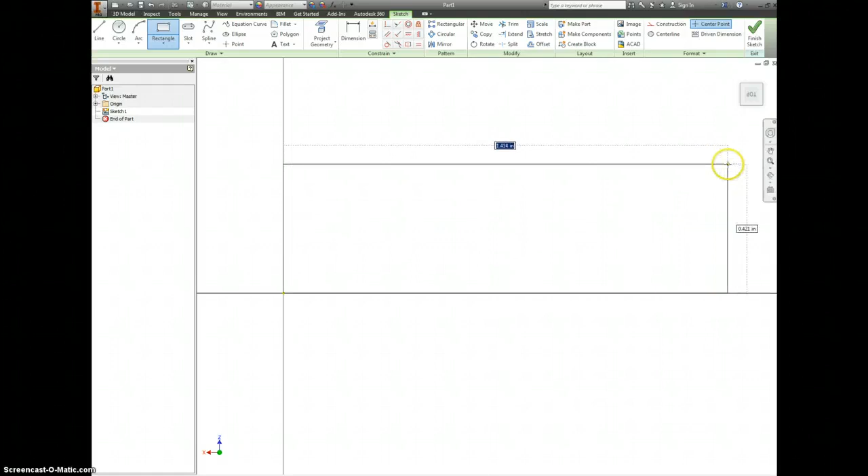Alright, so now we're going to make the puzzle cube box. To make that you have to use a series of rectangles, but there's a couple things to be careful of because we are going to be using a laser engraver. If you feel like you already watched this video, it probably changed on you, so be aware of that.

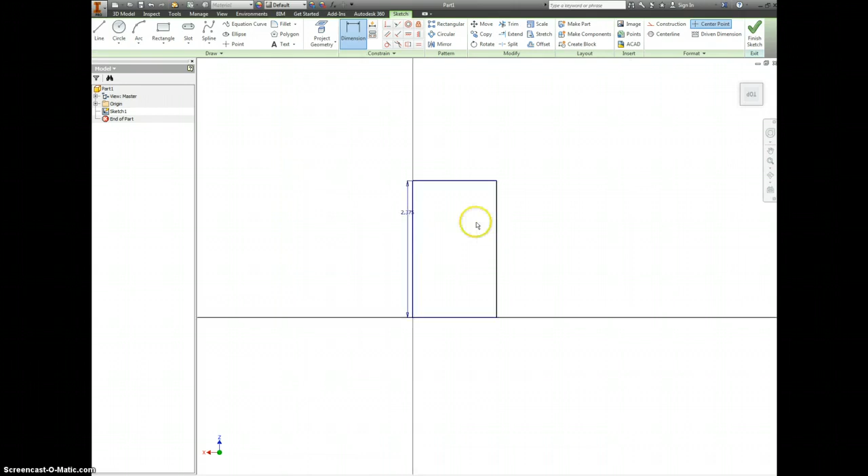Let's see here, we need to make this a little bit bigger than 2.25, so let's go 2.25 plus an eighth of an inch, 0.125. Not 1.25, 0.125. Alright, so that's how tall one square should be, 2.375.

We're just going to click and, not dimension, click and drag this out, so this looks about right. And we're going to use lines instead of rectangles. The main reason is I don't want to overlap any of my lines.

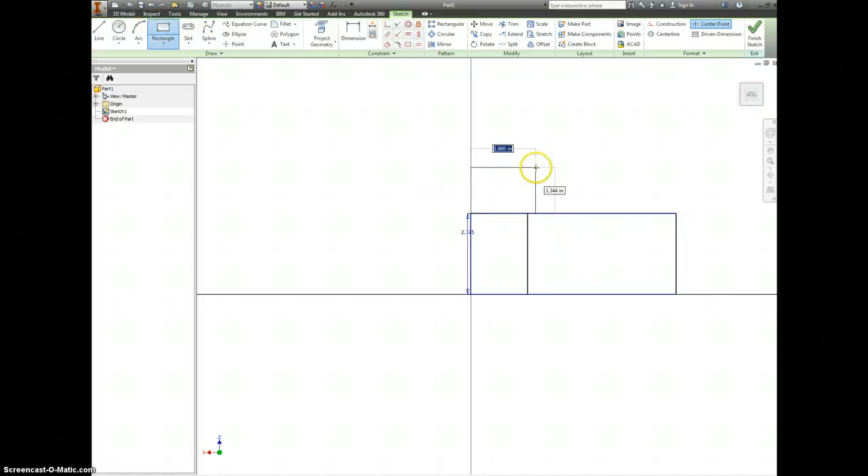Like if you use a rectangle, if I drew a rectangle inside of here, from here to here, now this line from this rectangle is overlapping this line from this big rectangle, and that's no good. The laser's going to freak out about that, and the whole thing will stop.

Alright, we do want them all to be the same size. We want them to be squares. So let's come up with something kind of simple we can use here.

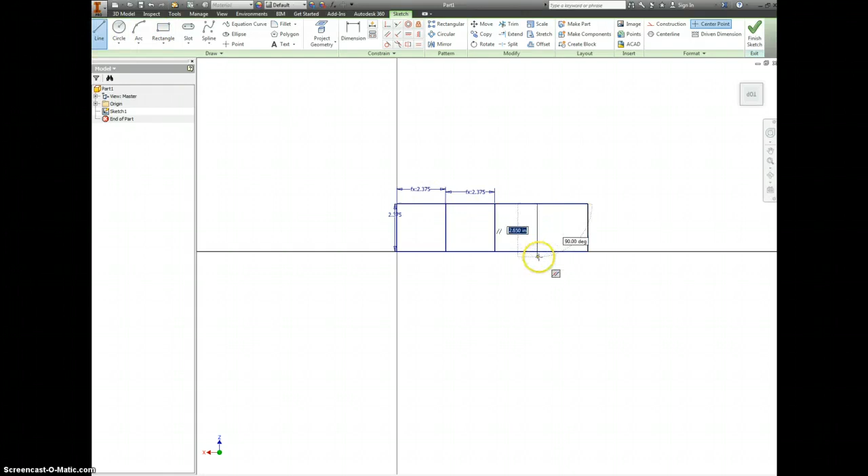And again, you want to make sure this will fit onto a piece of paper. So this can be no longer than 11 and no wider than 8.5.

I'm just referencing this dimension. In case I ever wanted to change all of the squares, I would just change this one dimension and they would all change with it.

Alright, so we have a top, side, bottom, side. And we should probably add a dimension to this one.

Alright, let's just double check. All of these add up to 9.5. So if that's the 11 side, that should be fine.

Let's go ahead and this time I will use a rectangle, but I need you to pay careful attention to what I'm doing right here.

Going to trim. I'm removing one of those line sections. Just click on it once. Don't click and drag, so then we'll get rid of both of them. So trim, single click.

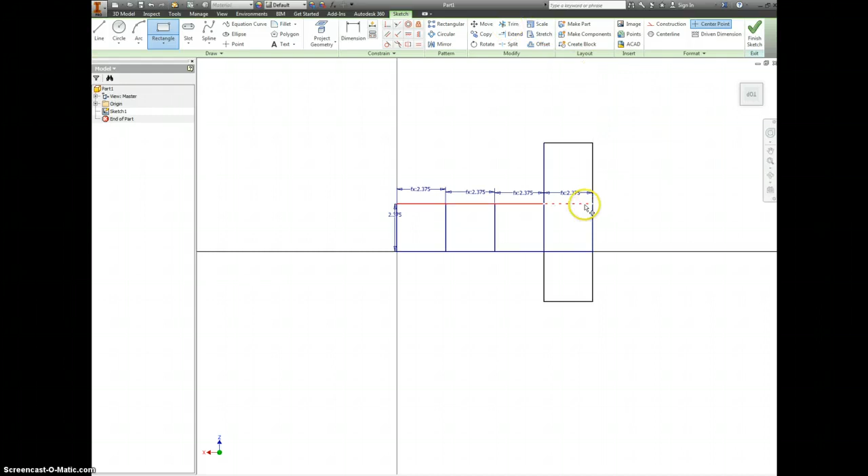Okay, let's dimension this out. I want that to be the same as this D0. I want this to be the same as D0.

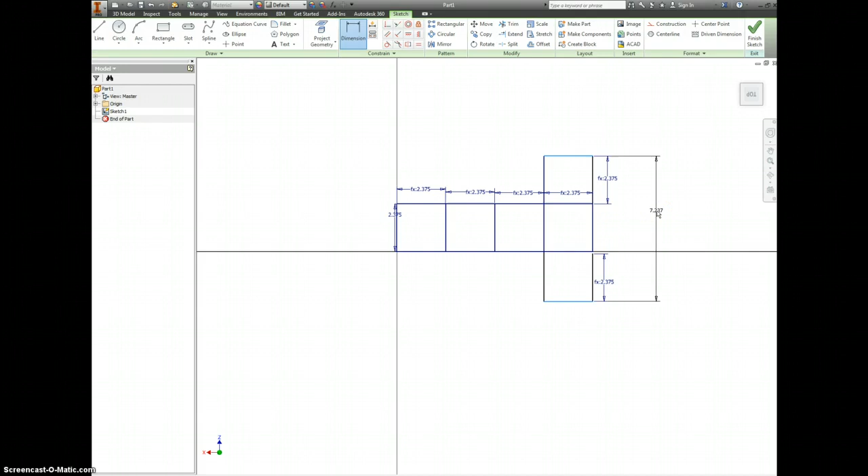This is a really basic, kind of boring puzzle cube box combination, but this is less than 8.5, and this is less than 11. Now, this isn't going to entirely work unless we give it some tabs.

So you can come up with these on your own. An easy way to do this is if you draw something up kind of like this, and then you go to a vertical constraint.

You find the little green dot on each one of these, top and bottom. It'll line these up for you. It'll make it to where those are the same.

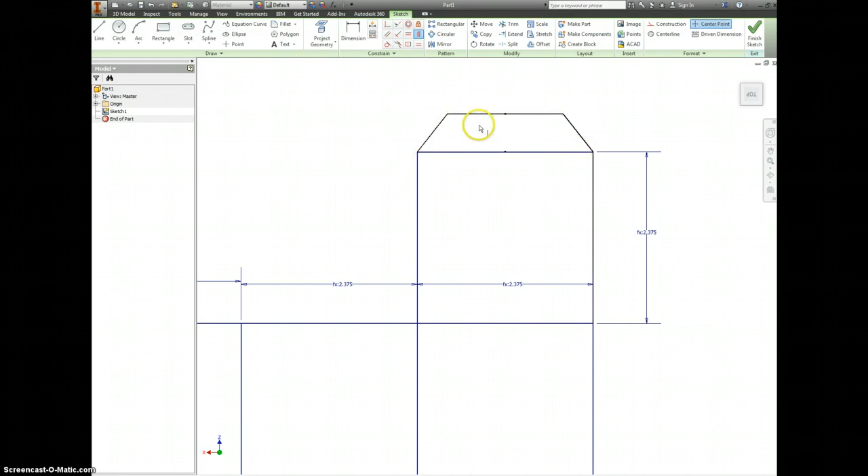Okay, you want to put these on both sides. Again, you want to be able to put the entire box together with glue and not tape. So think about where things would have to be glued together.

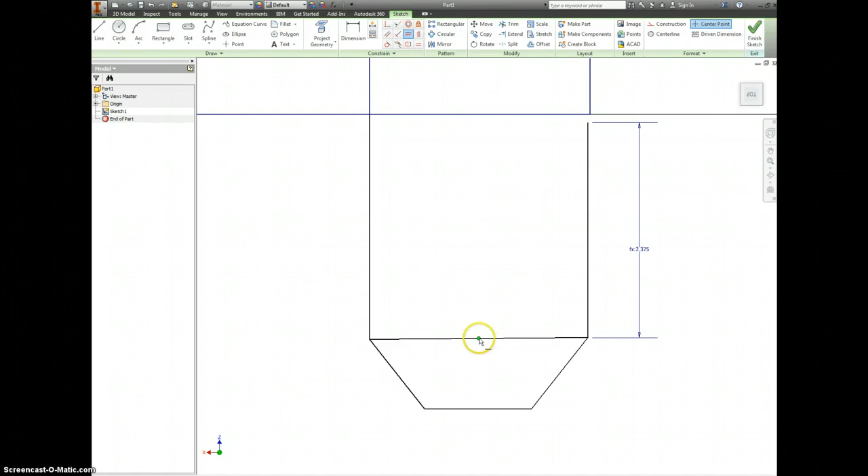If things start to get off on you, you can use a horizontal constraint like this. Click on the line. Oh, that's why. This was never actually attached to here.

So let's go back and attach that. So that has to be attached to there.

Vertical constraint, let's straighten these lines up. That's looking much better. And then vertical constraint on the two little green dots. That's looking good. If I want to constrain on these dots, I can make those about the same.

And just double check that your overall width is still less than 8.5. I'm not, it's 8.7. So I can click and drag these down and test it again.

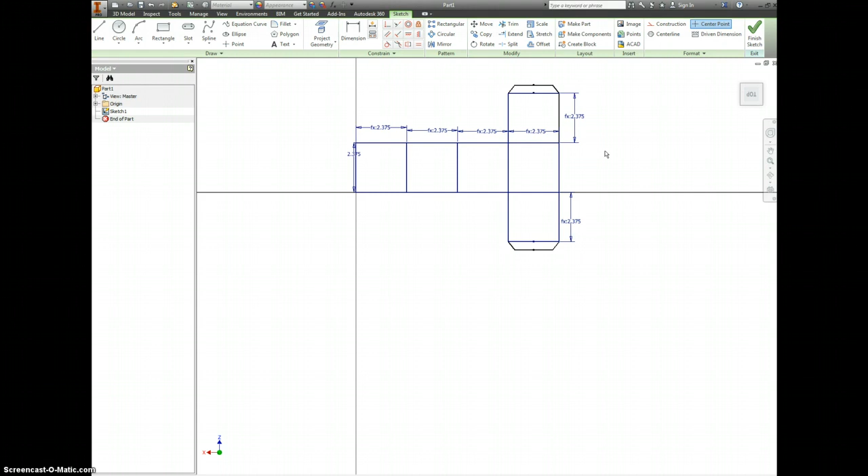There we go, 7.8. That's less than 8.5. Good. You're probably going to need more tabs in this, but that isn't the important part right now. So let's just save this.

Oh yeah, we have to finish sketch mode. So finish your sketch mode. It'll be in with the other puzzle cube stuff. I already have it packaged. I started the demo, but we'll call this package 2. I made some changes.

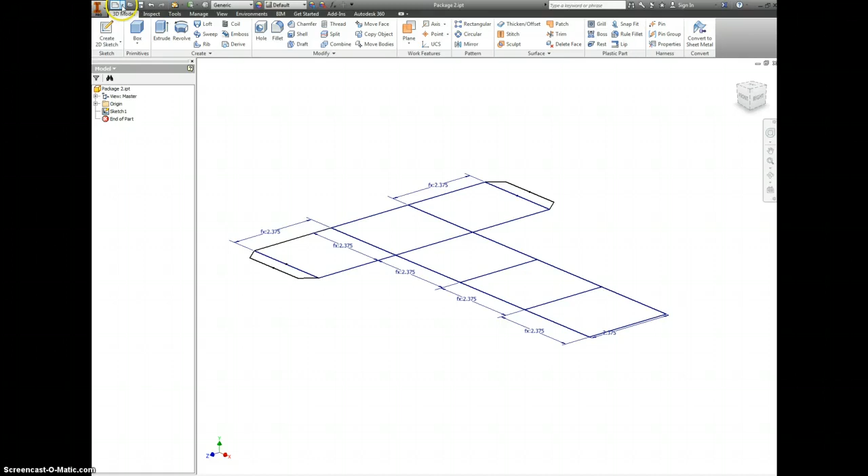All right, let's go to new drawing. You have to change the sheet size to A. Edit your sheet, make this A size paper, 8.5 by 11. Click OK. Right click, delete your border. Right click, delete ANSI large.

Base — I can't see mine. Mine's going to be the top. Yours might be left or right. You have to find whichever view it belongs in.

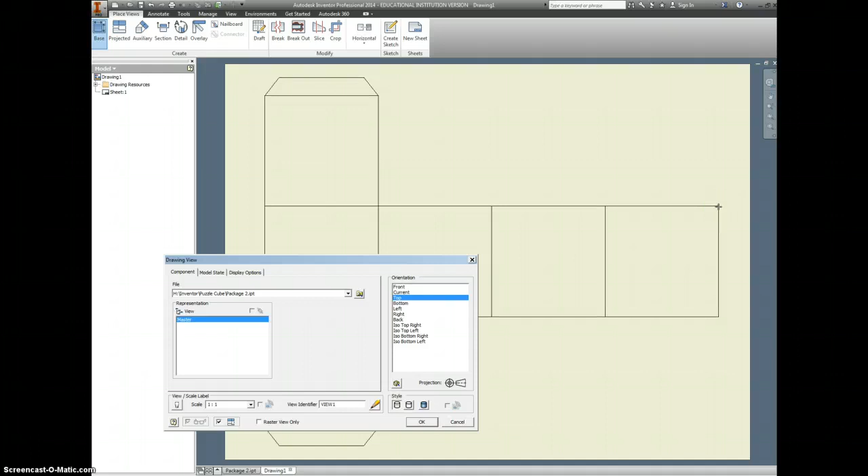You're going to save this right away as a DXF file. To do that, go up to this big I, select Save As, but don't click on it — go to Save Copy As. You want to change this to a DXF file, which is here.

Instead of saving it in your stuff, I want you to rename it with your last name, and maybe even first name, last name. We're going to put it on the shared drive.

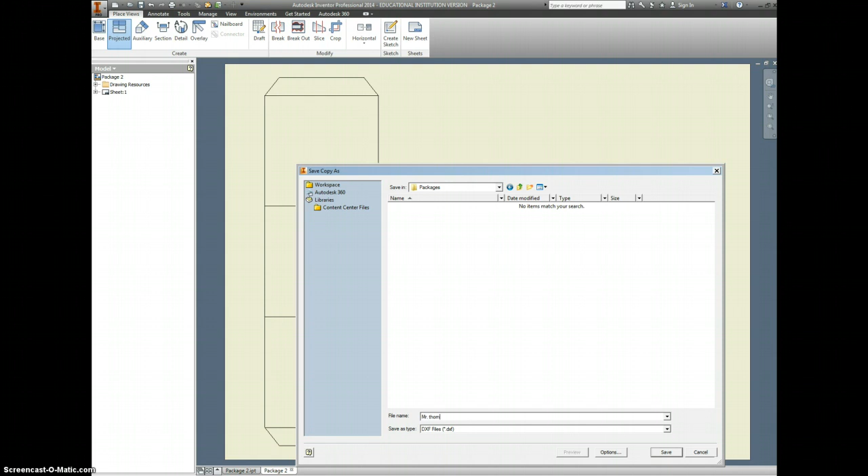Go into Shared, BCHS, PLTW, IED, and inside here you have this one for packages. Double click on packages. You're going to rename this with your name. You have permissions to save files into this folder — it's one of the few where I changed the permissions.

As soon as that's saved, then we can start to do stuff. Now when you go to base, just like before, you can go and search for your solution here. Open this up. If you go half scale, it should fit. You want an isometric view.

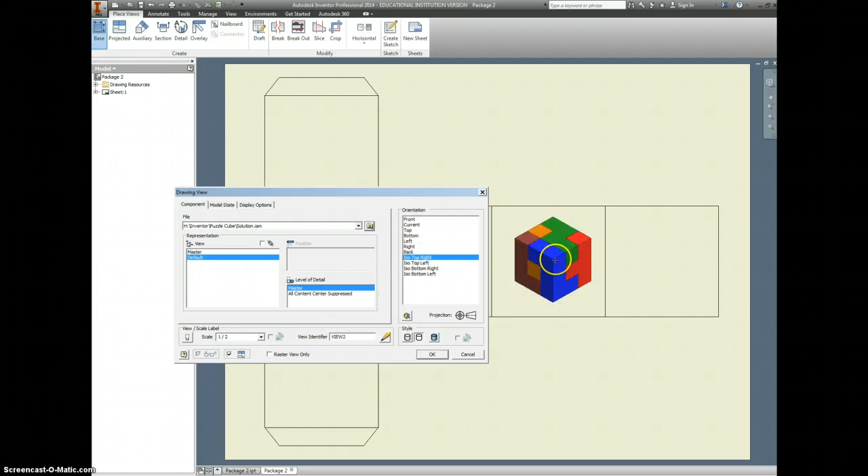And you probably want that to be shaded, so go back and make it shaded if you need to. As far as getting words and text and stuff on here, just go to Annotate. Here's your text button. Type in using whatever font you want, not Wingdings.

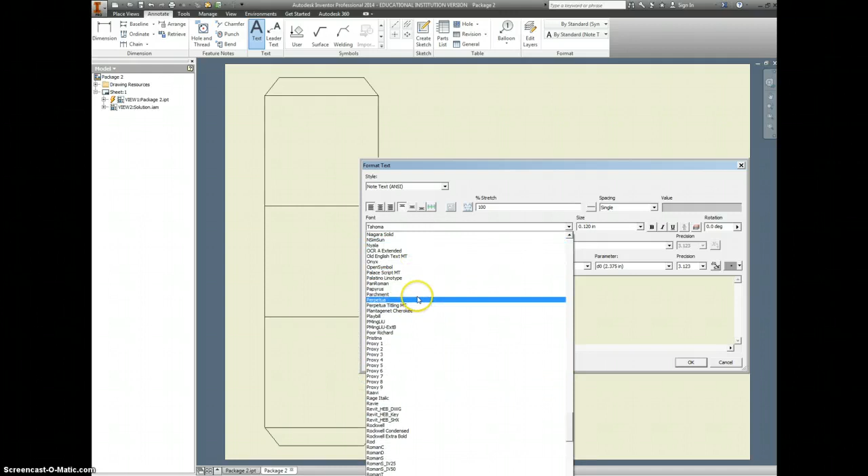I don't know, let's find something. And whatever size you want.

So there's my puzzle cube. Now if I need to, I can right click on this and rotate it 90 degrees. I can just keep rotating around if it was supposed to be facing some other direction.

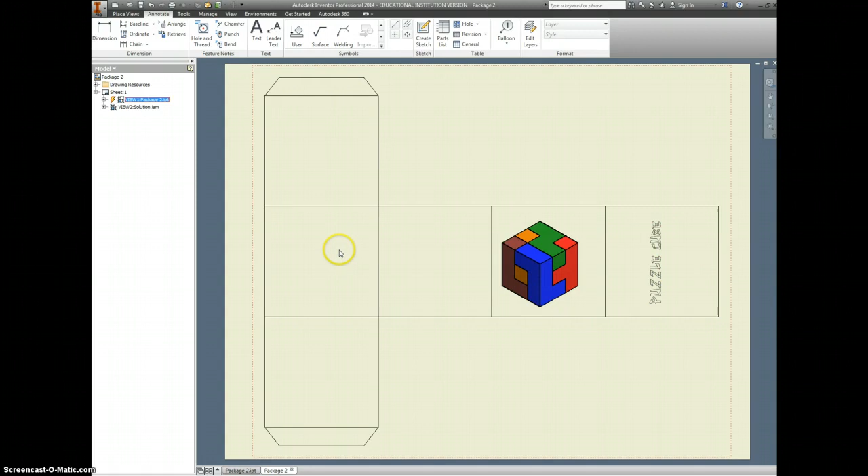If you want to put in a barcode or something, go up to Manage, Insert Object. We want to search for a Word file, so there's just Microsoft Word document. Click OK. It makes a new one called Document in Package 2, and you can open up a new web page.

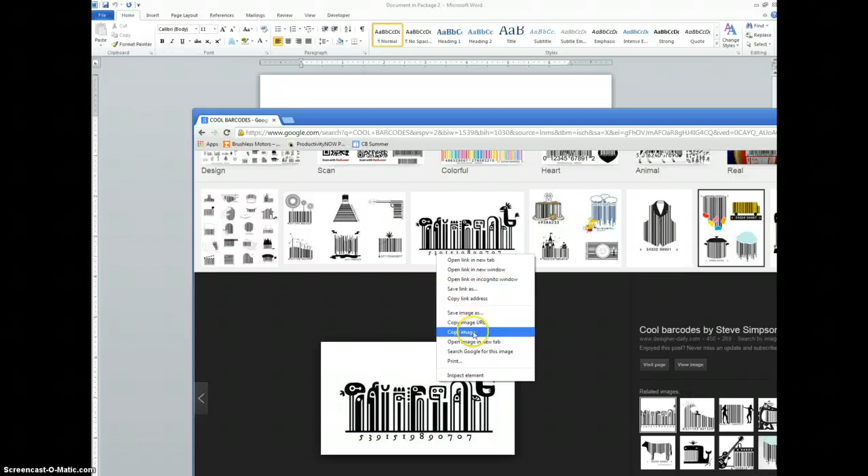I might search for cool barcodes, and let's say I like this one. Right click, copy, paste.

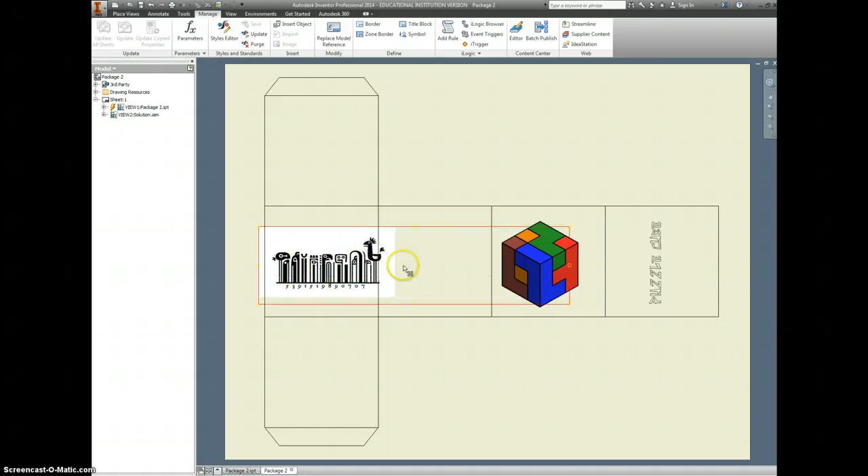Go back to your Inventor document. You have this little window where you can click somewhere and paste it in, but now we need to stretch it. And you may have to rotate it if it isn't facing the right direction.

Otherwise, make sure you have your other things on your checklist, including your country of manufacture, name for it, your name, warnings, price — that might be about it. Just go through your checklist and make sure you have everything you're supposed to have.

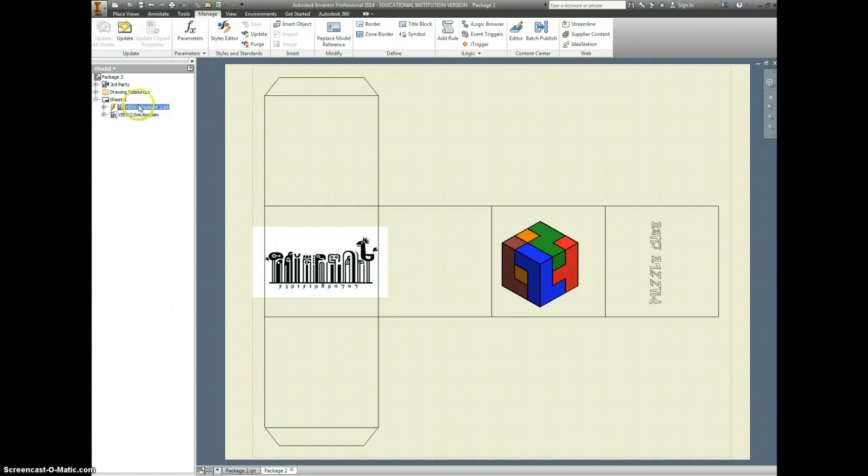When you're ready to print this, before you print, I want you to delete this view 1 over here, so you will only be printing the colored stuff.

We're going to save the DXF file to cut out with the laser engraver. We're going to print this out on regular paper, combine the two, and you'll have a specialized package for your puzzle cube. Good luck.